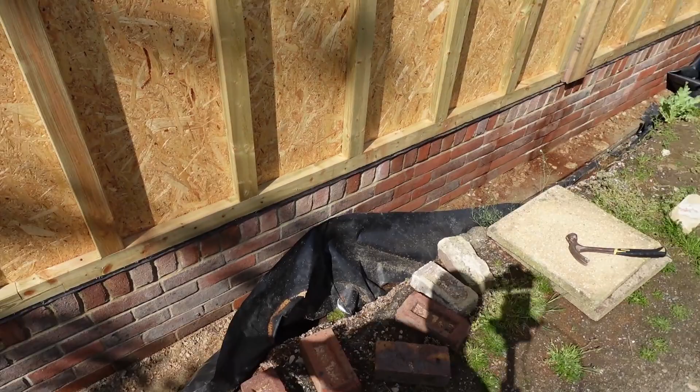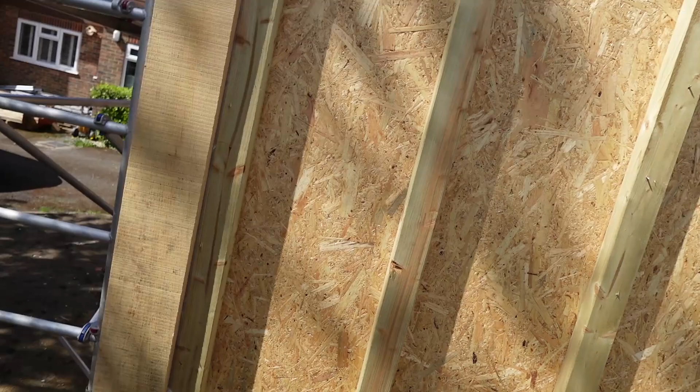We have sealed the gap between our timber plate or stud and damp course. The same we've done with the side. We've used just a general silicone, builder silicone, to do this stud to timber.

So as that in there is a garage, we don't need to insulate anything. So all we're going to be doing is putting the actual roofing felt, breather felt, and after that we'll be cladding it with oak feather edge.

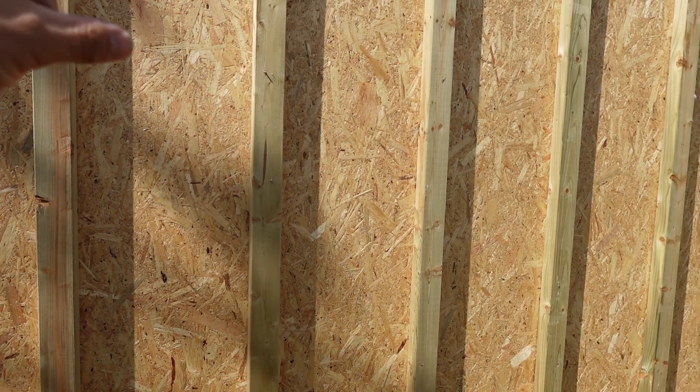But if this would be like an outbuilding, you would have to obviously insulate it, put your felt, put counterbatten to allow for airflow, and you have to have like a vent trim on the bottom, so there's airflow, so obviously it doesn't condensate. But because this is going to be just a garage, we don't have to do that.

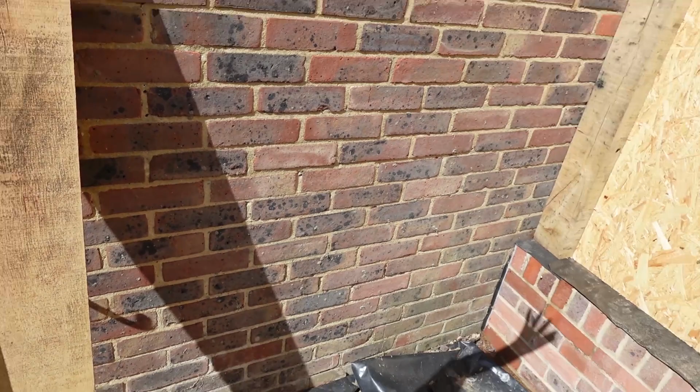Also, for what we're doing, it wouldn't work out because in our case we will be fitting these support struts, but they'll be only visual ones, so they'll be going from top to the posts. And because of the thickness, if we would have moved any further, you would need another 25mm for batten, so we would lose that, so we couldn't really do that.

So as this is a garage, it doesn't really need to be insulated, so we don't need to batten it out to give the airflow, as there won't be drastic temperature changes.

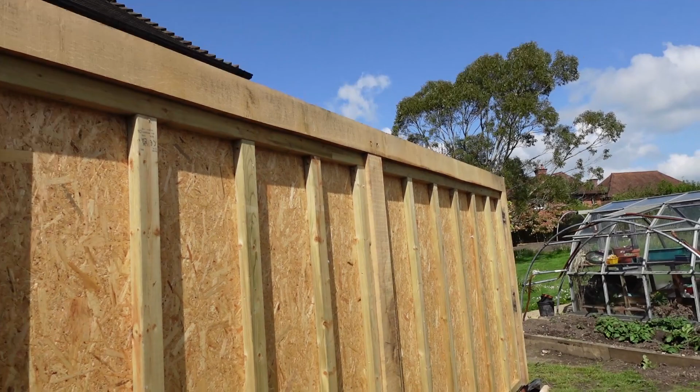So what we'll do, we'll put the felt, breather felt, and when we do our first board, we will groove it so it goes over the brick face slightly, just 10mm, so it forms the drip, and that silicone we applied will be a second line of defense if ever timber cracks or something, so it can't get through. So we'll have a silicone and our felt, which we're going to take over the edge. So essentially it should never really leak, because we'll have two layers of defense to stop it leaking.

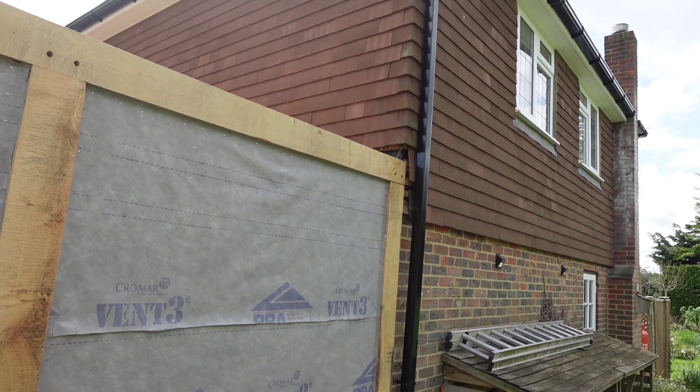So we have covered the sides, the back, with felt and silicone also, as I showed you. If you do your silicone, make sure it's weather tight. Next thing, before we clad it, I will be starting work on the roof. Reason being, obviously there is some movement, because it's not locked in at the minute, and so I want to make sure

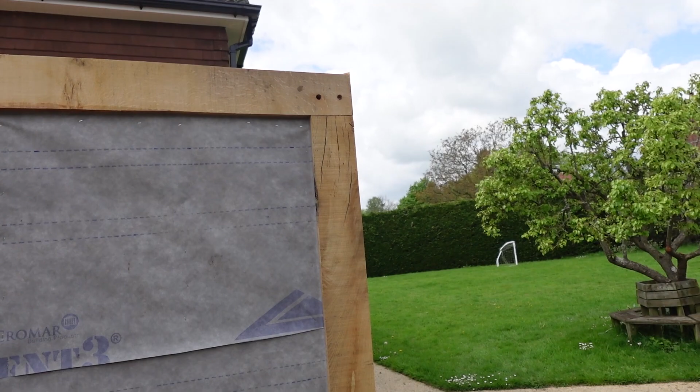I get it weather tight, because obviously the weather is meant to rain today, so I don't really want to start cladding and, you know, I won't get too far. I'll just set up and it'll start to rain, where I could start stripping the tiles and work on the roof itself. Just work out what we're doing.

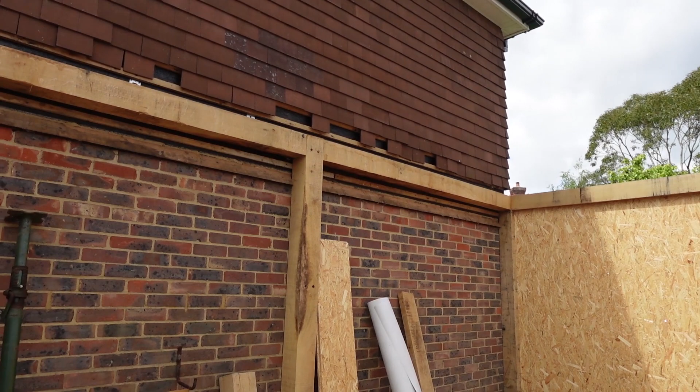Technically it should be around 41 degree pitch, but we'll see. I'll cut a sample and I'll just go up there and see where we actually are. So yeah, that's our next task. Work out what is the pitch, what the rafter is going to be.

As this is a lean-to, our ridge will be fixed to the wall on one side, and 2 hips going into it, so it's going to be a hipped lean-to roof. So we're going to work out first the rafters from side to side and height of the ridge. So I'm going to cut a 41 degree pitch to start with, and we'll see what that gives us.

Then we'll just offer the rafter onto the roof, and that way we'll be able to tell whether it's near enough or not, and if it is, then we can go from there. If it isn't, then again we can change the pitch slightly. So yeah, I'll just use one of the longer lengths. I think I've got 4.2s for this, so this should be enough, and I'll catch up with you in a bit.

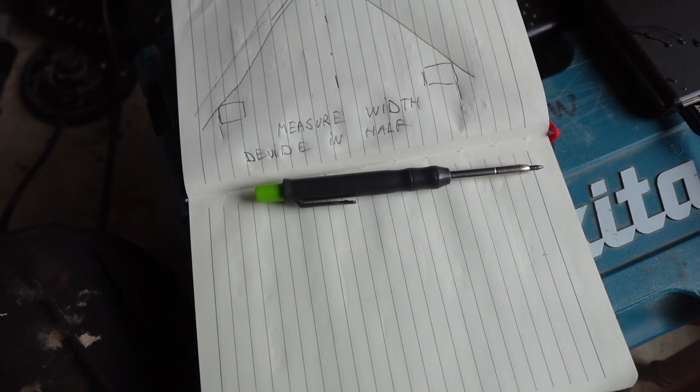So just wanted to run through what I did, as it's starting, honestly, to rain. That's my luck for you.

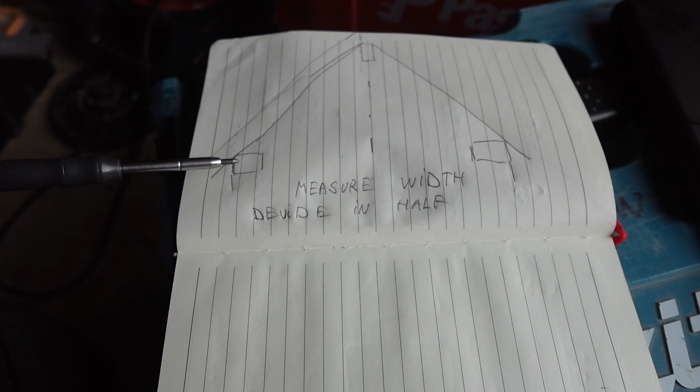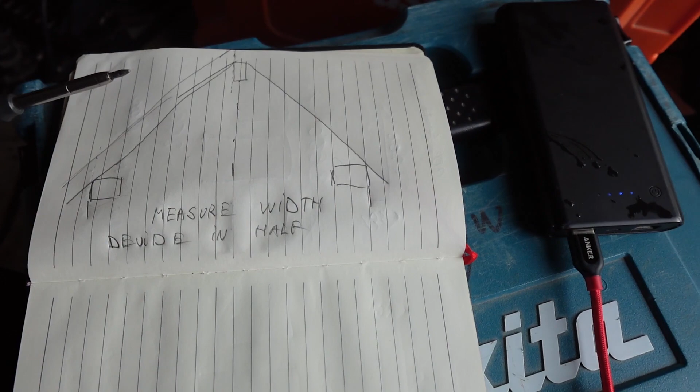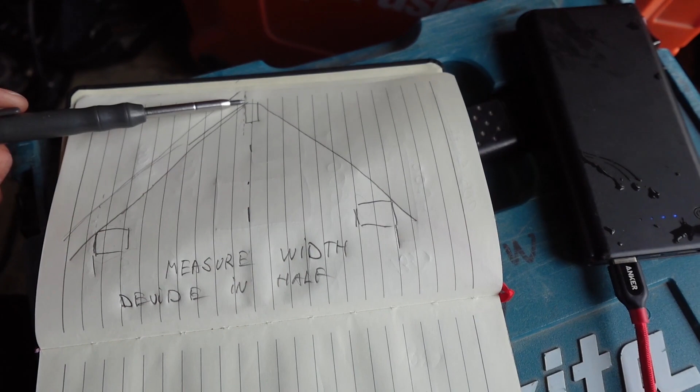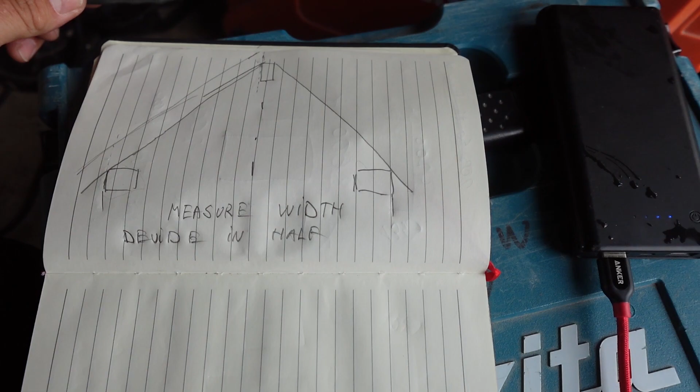So first you need to do is measure your plates, the width, divide it in half. Next step, because we didn't know the actual pitch of the roof, I set my ridge at a height where it would not be in the way of everything, and a reasonable height, so it's easy to dress the lead and everything else, which was around 350 down from the soffit of the existing garage roof.

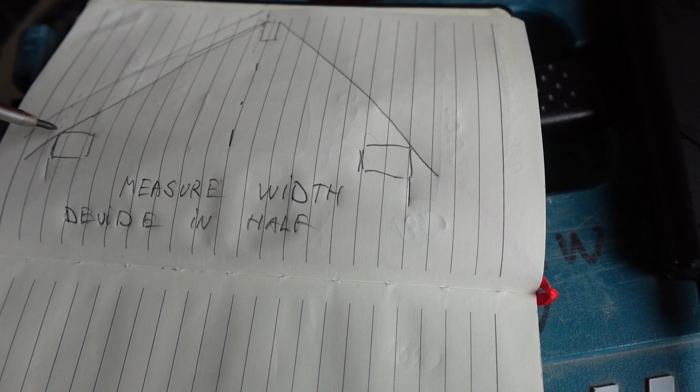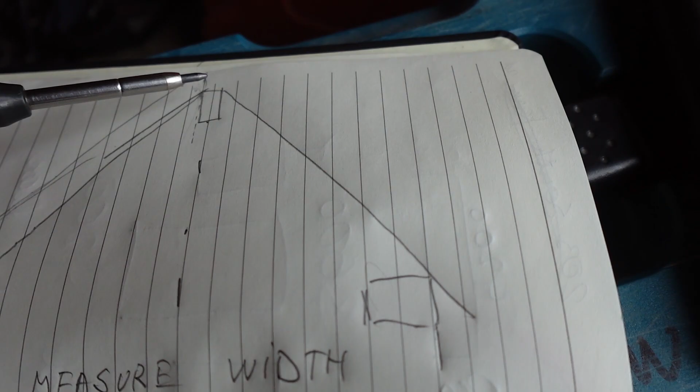So next step, I put my rafter without any cuts. As you can see, that's where I put it onto the actual oak beam, and up to where I marked these marks out where our ridge will be.

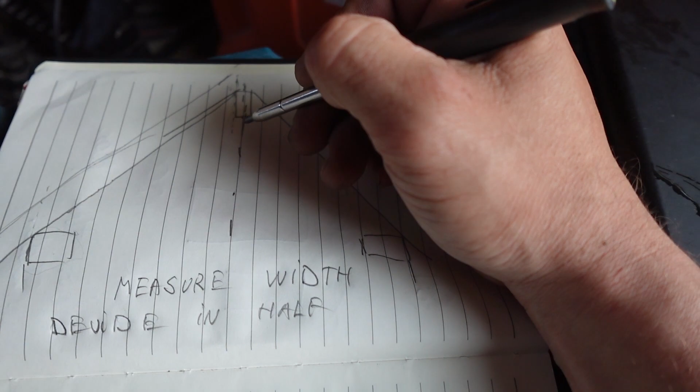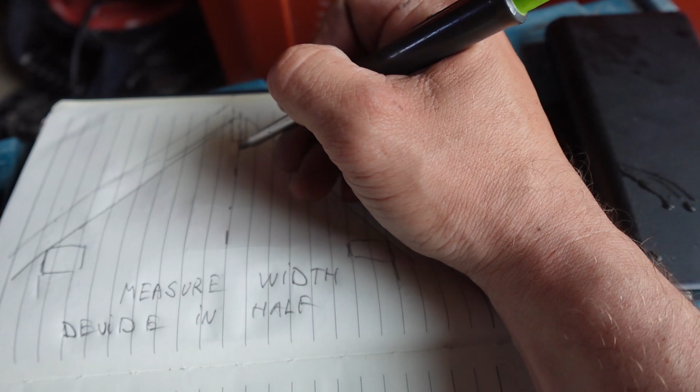And don't forget that your ridge, this is the center of the ridge, so whatever thickness of the ridge you're gonna have, usually it's like 8x2, 9x2, 6x2, etc., depending what roof you're doing. In my case I think it's 6x2, so this measurement divided in half is the center of that thickness.

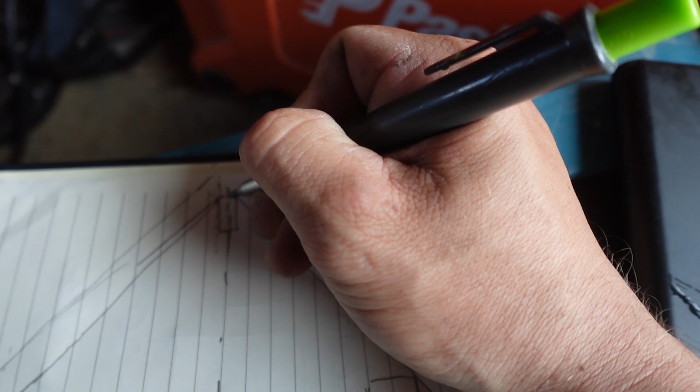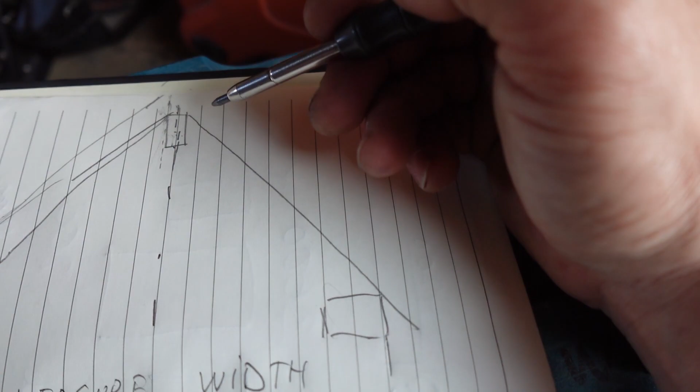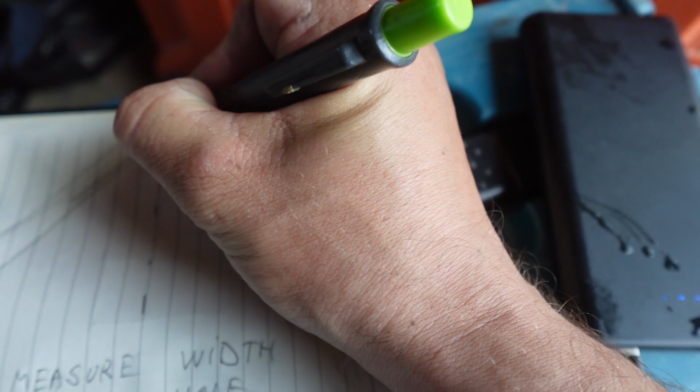So I marked the center line up first to the tiles. You can't see it, I did try to show you, but you can't see it because obviously it's dark tile and pencil doesn't help. You need to get a right angle on it. So I offered the rafter piece where it touched the top of my ridge, and the bottom of it sat on top of the oak.

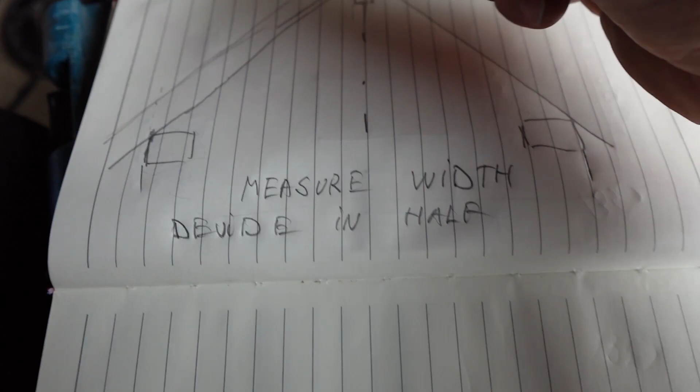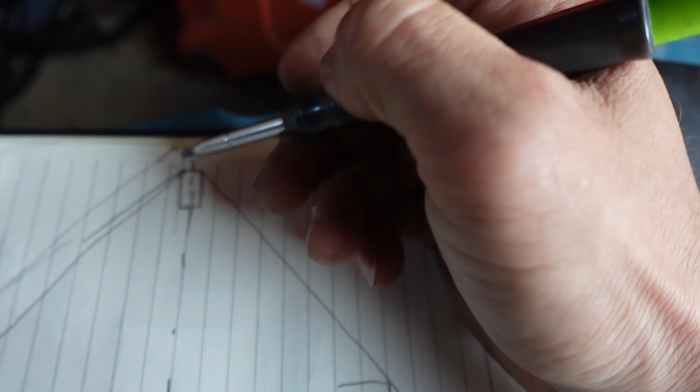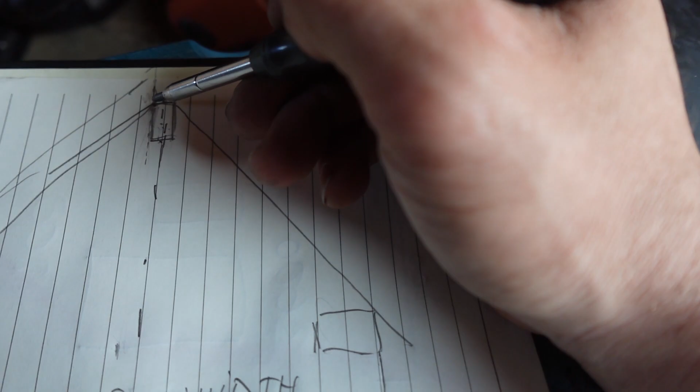Then I took my level and marked up level with the ridge, which was marked on my tiles, and marked the line, transferred the line basically on a rafter, which gave me my angle, pitch, sorry. So the pitch is 30 degrees.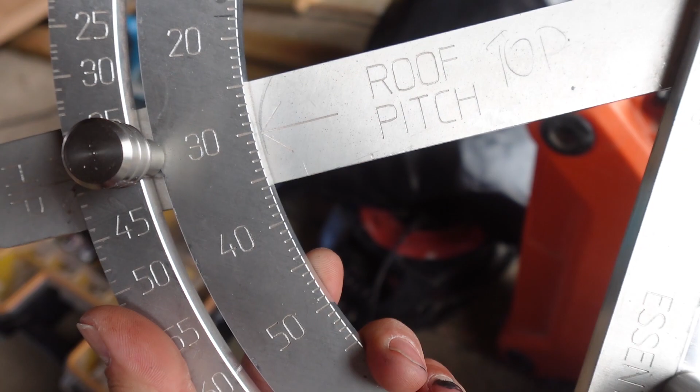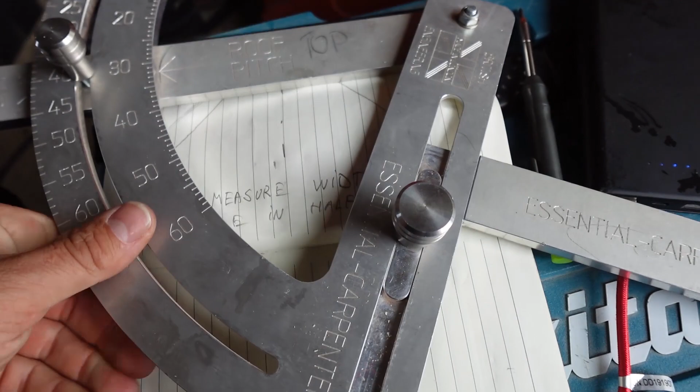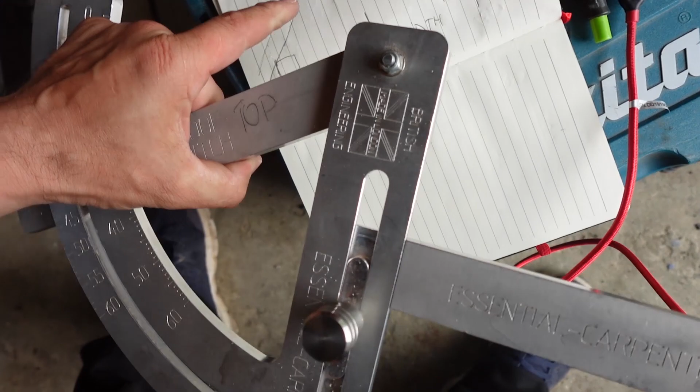So again, I have used this Essential Carpenter square before. It's brilliant because once you know your pitch, you set this, it will give your seat cut or bird's mouth cut. So you set that at 1/3 of your timber, which I did. So once I've obviously found out what is my actual pitch, next step is you need to find out the length of your rafter.

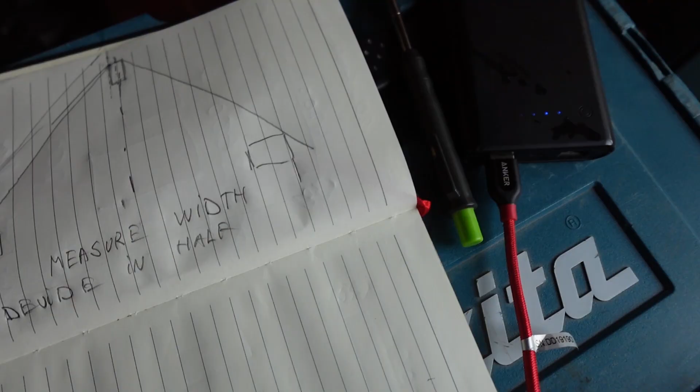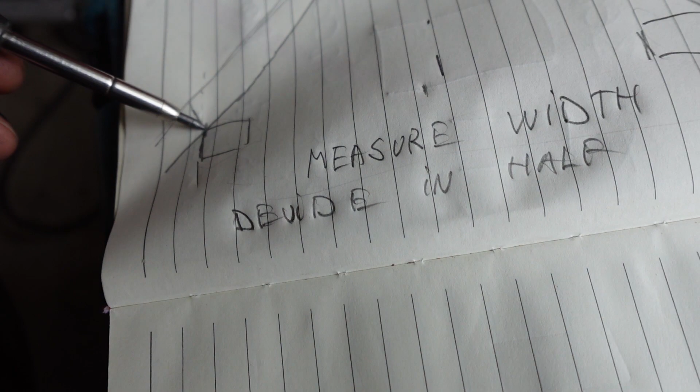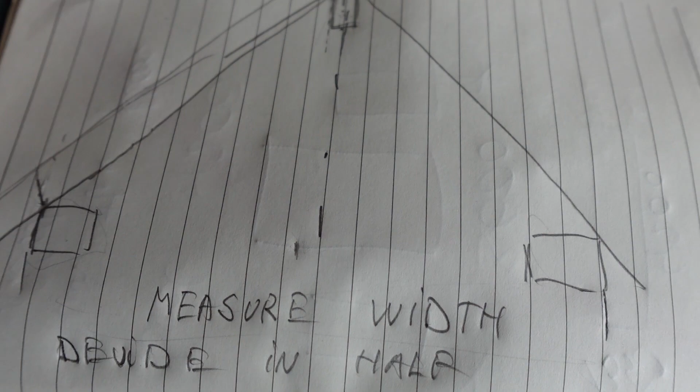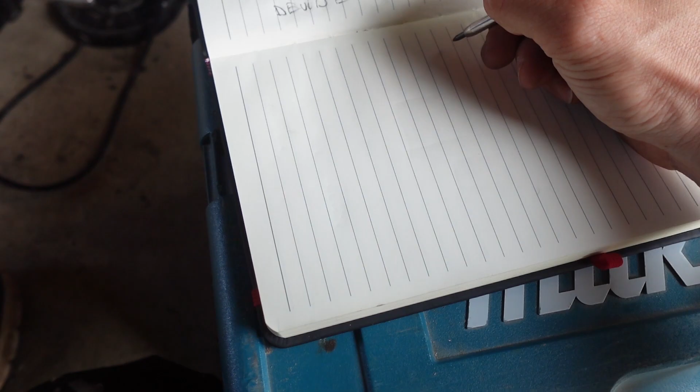I tacked the nail in just before the corner of the beam. Then I took the tape measure from here to the point of where the ridge will be, and that gave me my measurement, which was 3.3 meters. So that's the measurement from point to seat cut. And what I did then, I'll just draw it out here. Then I've cut my 4x2.

So you measure from the point and you go to roughly where your seat cut will be on the timber. You know, it's 1/3 of the timber, so that's how you can roughly work it out. And you measure down like this from the tip onto roughly where the position will be, and you will get a slightly curved line.

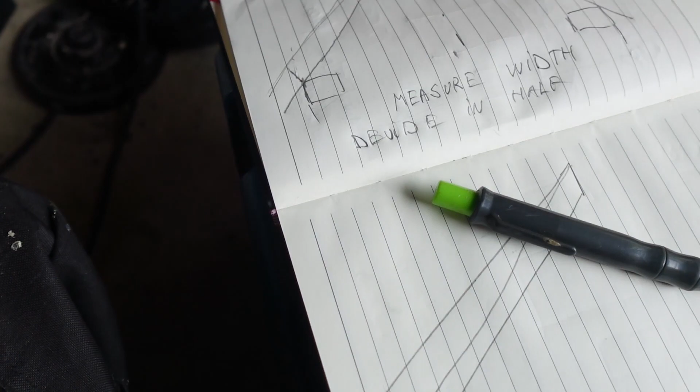So you sort of get your measurement and you draw a line, and when you use the square, knowing it's set at the right 1/3 of the timber, you place it on the timber and you just cross the points, and that will give your seat cut. There are other ways of doing it, obviously, but this is the way I do it myself.

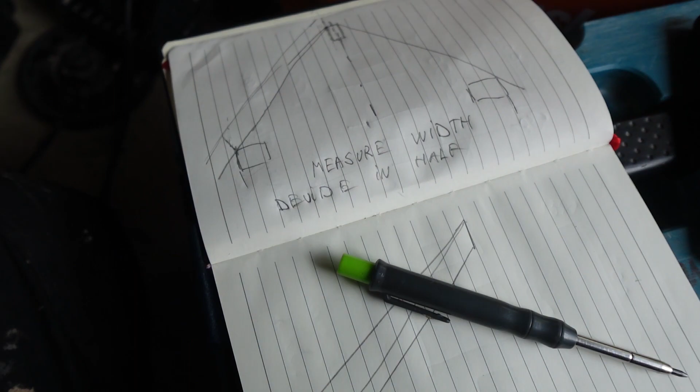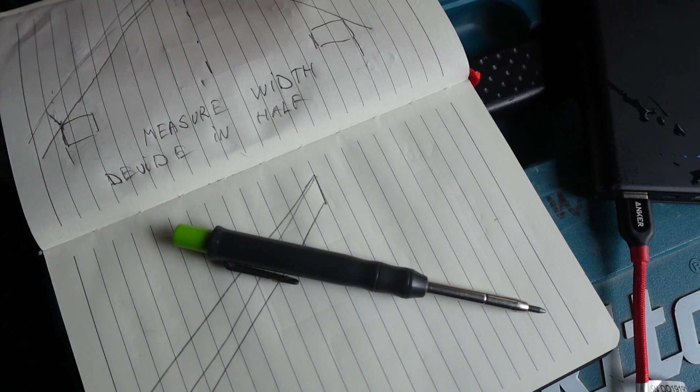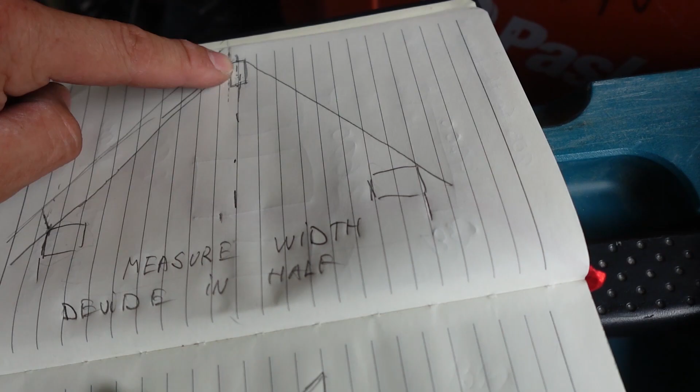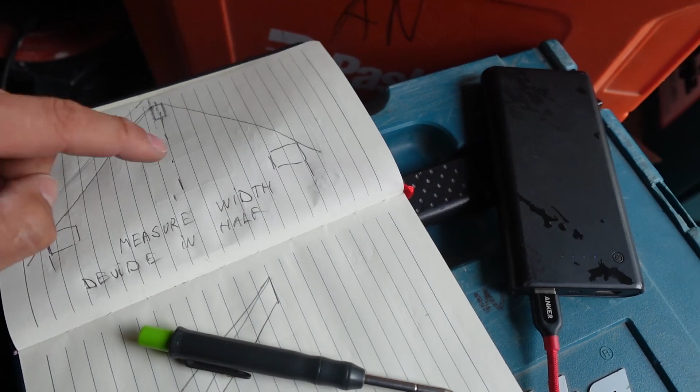Sometimes you know the pitch, and if you know the roof pitch, what I would do, I would cut 2 pieces and I would put the 2 pieces over until they meet on the center line, and then I would mark on those timbers. So I would screw the 2 together and I would mark obviously where our seat cut will be.

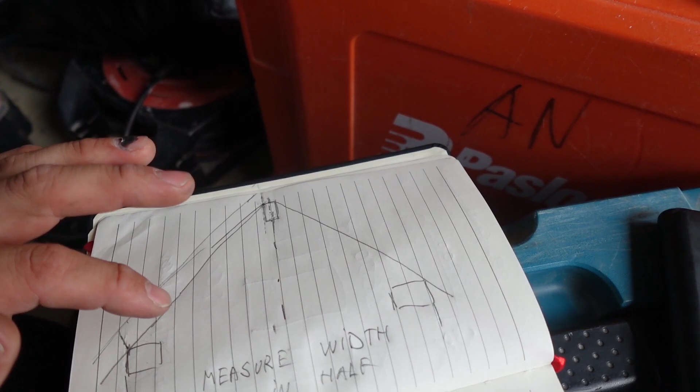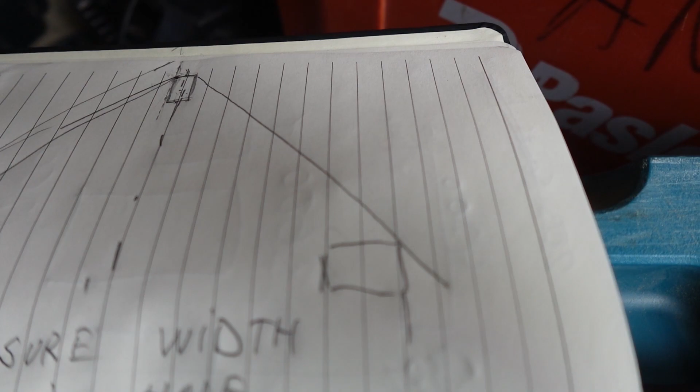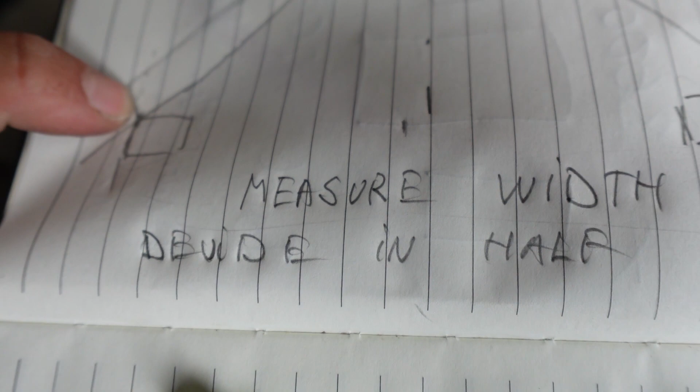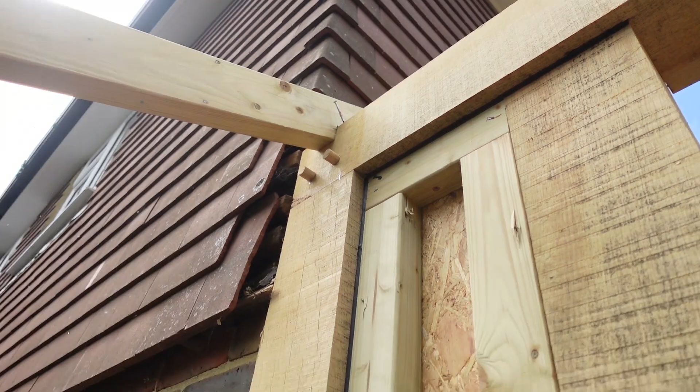But because we are restricted on the height, we couldn't just go with the number and assume that it will be fine. It just wouldn't work, it would be too high. So hence why I marked it all out on the actual back of the house on tiles, and I just offered a piece of wood, marked where everything is, then put the nail in a corner here in the beam. I might be able to show you. So yeah, you can see there is the nail there. So I took my measurement, tape measure.

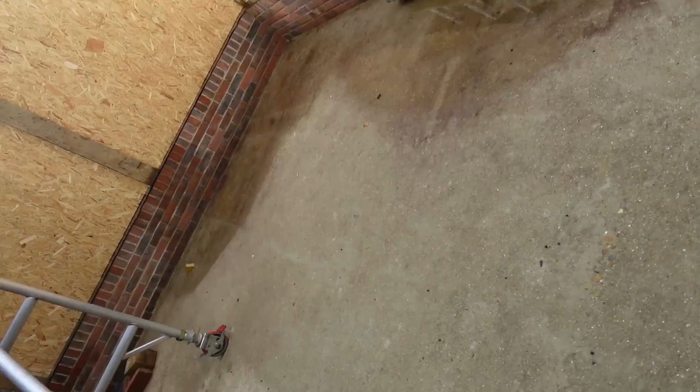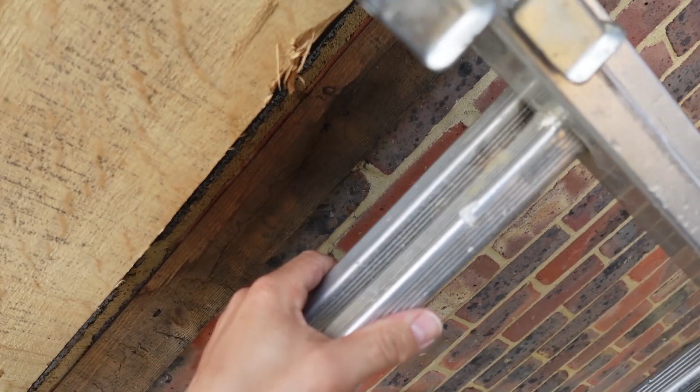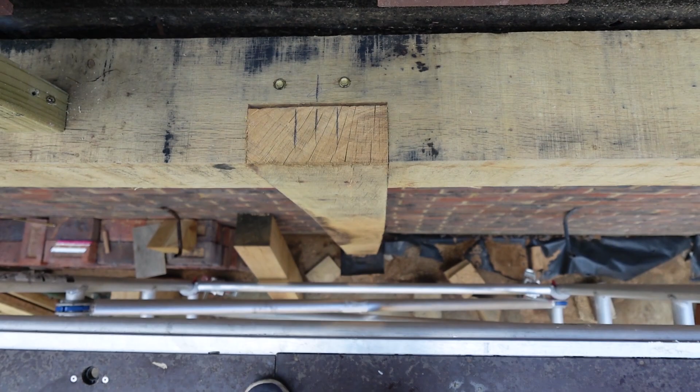Let me get up. So it's clearer. So as you can see here, I have marked it. So marked it also on the bottom. There's my nail in the beam, or in a plate if you like. So you have probably a plate, roof plate.

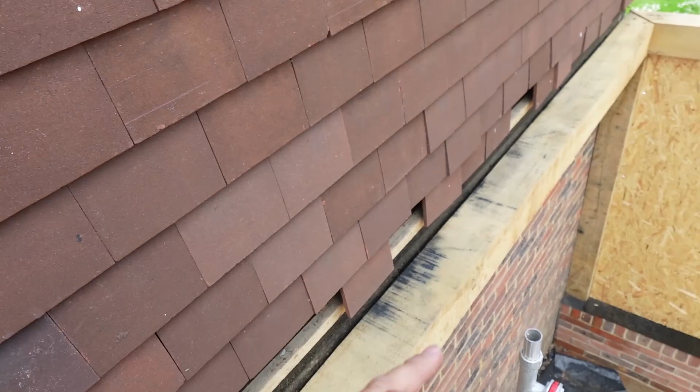So this is a prop to temporarily hold it in position, and as you can see, it follows my line which I've drawn by dividing half of the overall width and marking the center. Mark the center there, or you can just go either way depending on what thickness is your ridge, and transfer the measurement up there onto where the ridge will be.

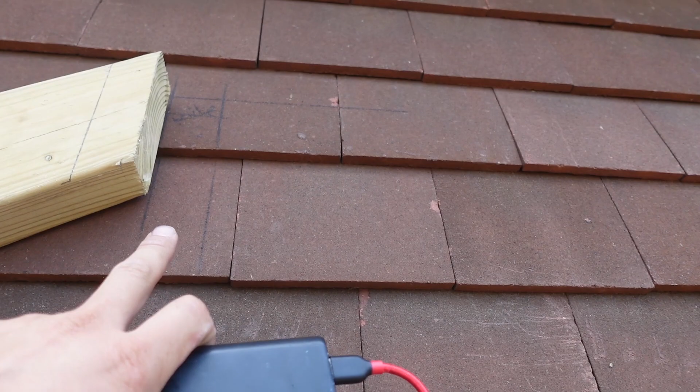So obviously, if you want your ridge to be proud by 20 mm, which I do suggest, because when you do your ridge, it's just less packing for you to do. And if it's a dry ridge, you want it to be roughly 25 mil higher above your top of the rafter, and that will give you easier fixing points into the ridge for your dry ridge kit. So yeah, that's what it is.

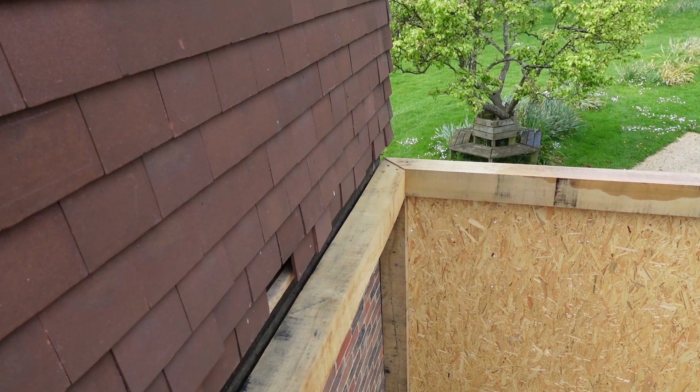And then basically once you've done that, I'll do the next one the same. But as you can see, we got a problem there, that our beam on the left hand side is a lot thicker than the other beams. I've shown you on that side too. So what we're gonna have to do is allow for that cut to be deeper on that side by whatever that thickness difference is. So that's the only downside.

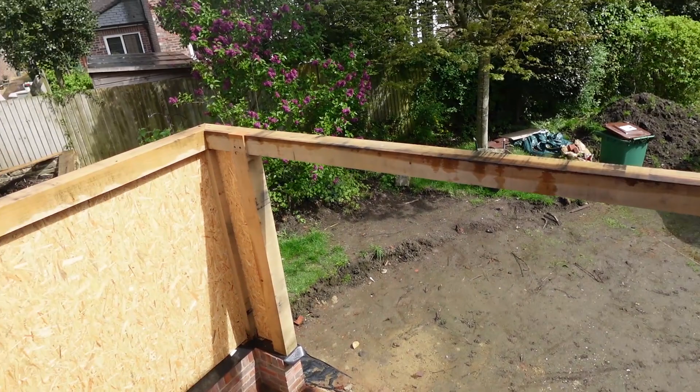On this side it's more or less okay, and that is half. That beam basically is between that and that. So we got 3 thicknesses of the beams, unfortunately. So yeah, that's where we are, and I'll catch up with you in a bit.